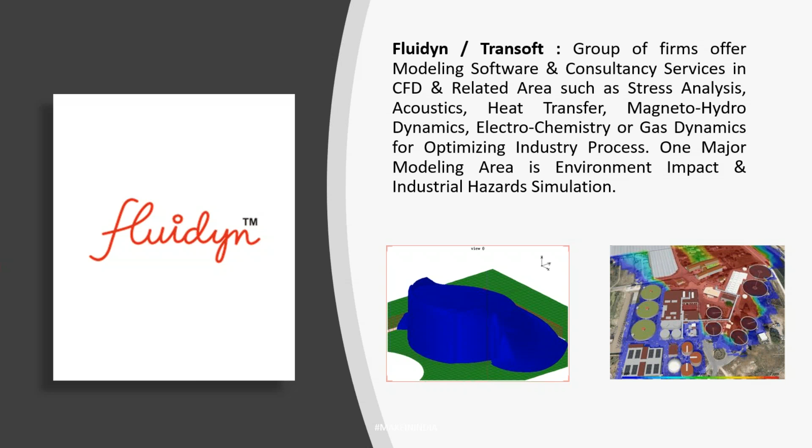Here we will cover some problems regarding what happened recently in Vizag with the styrene leakage. So this is our history. Since 1987, Transoft Fluidyn Group has had stable and consistent growth, and it is fully owned by employees for long-term stability and technical orientation.

We have scientific software development and solutions like optimization of industrial processes by multiphysics and general CFD simulation. Then industrial, urban, and traffic impact assessment and solutions. We have our Panacea product, and some risk analysis problems we are also solving. We have more than 100 PhDs and masters skilled personnel.

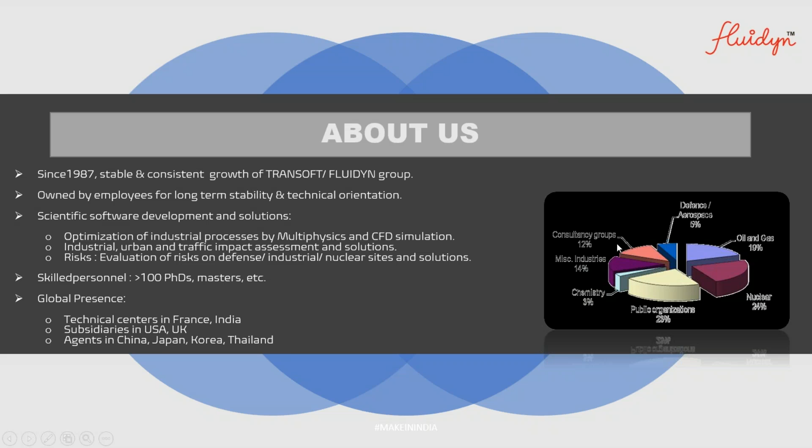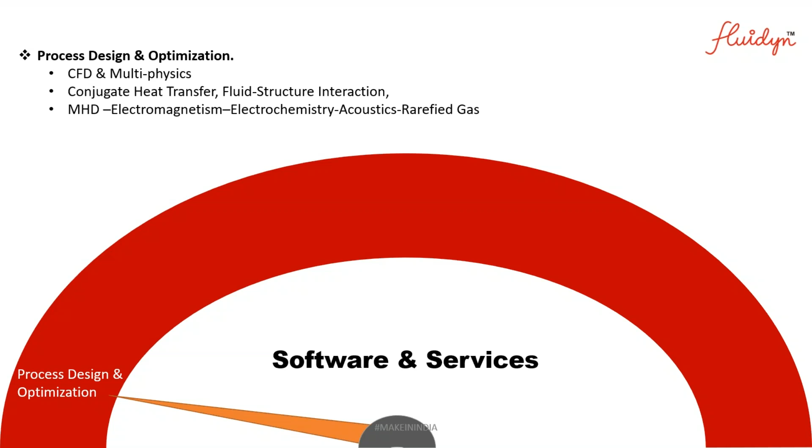So here I want to explain a little about our software and services. For process design and optimization, we have tools for CFD and multiphysics, conjugate heat transfer, FSI, fluid structure interaction, and MHD and electrochemistry. For environmental impact assessment, we have tools for urban air quality, health impact, industrial pollution, water, air, odor, noise; all kinds of pollution are covered. Source apportionment and leak detection in real time is also possible with our tool.

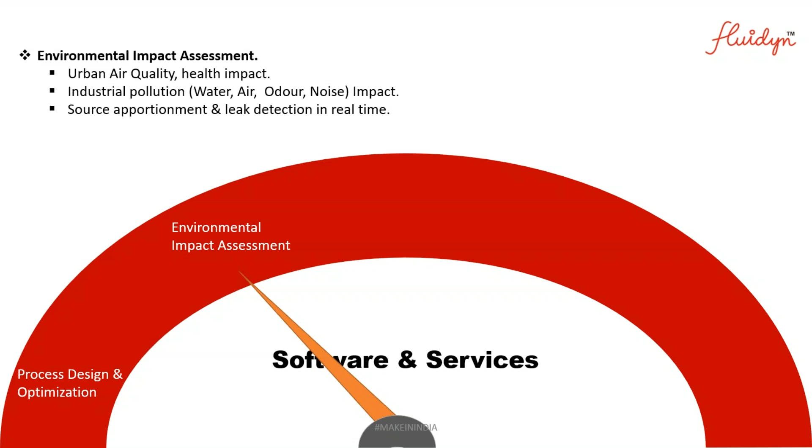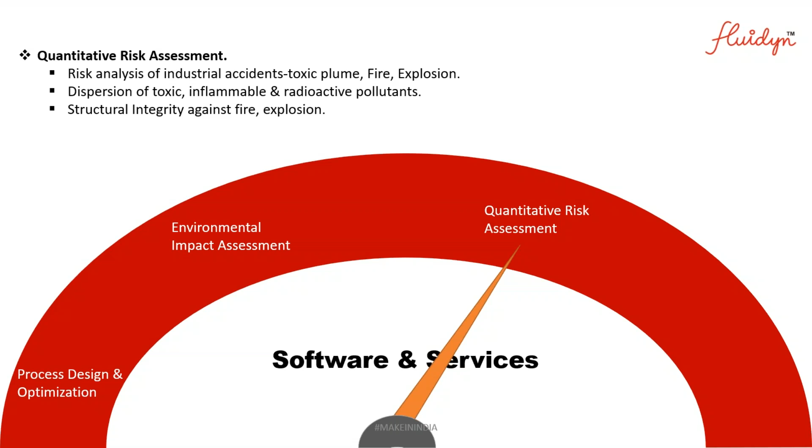Then quantitative risk assessment, risk analysis of industrial accidents and toxic plume, fire explosion, dispersion of toxins, radioactive pollutants, all kinds of solutions. And the last one is ventilation and HVAC, regarding energy efficiency, and some filtration applications. It is useful for hospitals, data centers, malls, parking, clean rooms, etc. Ventilation optimization is also useful for energy saving, airflow in roads, tunnels, mines, rail stations, etc.

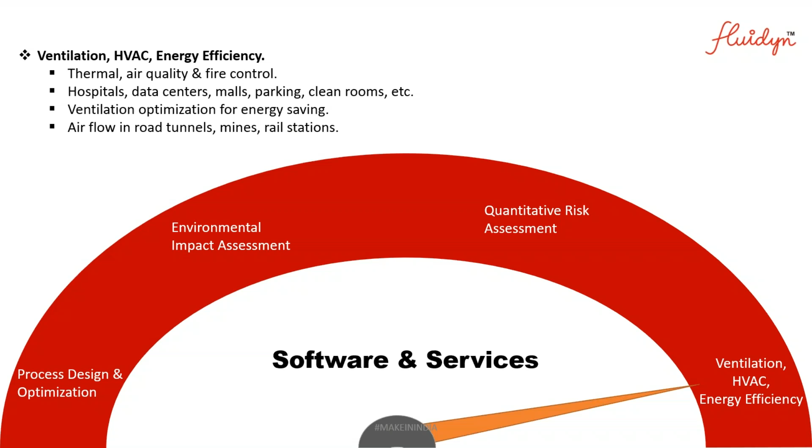I want to show you some key references we have in India. On the nuclear side, BARC, NPCIL, IGCAR, AERB; defense, DRDO. So many branches are there. Aerospace, ISRO, NAL, ADA. Then chemical, oil and gas industries, we have Reliance, EIL, ONGC, HPCL.

We are also in automotive and manufacturing. TVS, Gabriel, Renault are there, who are using our tool, or we have provided consultancy work to them. And many consultants are also there, like the French ministry and, from France, SIAAP.

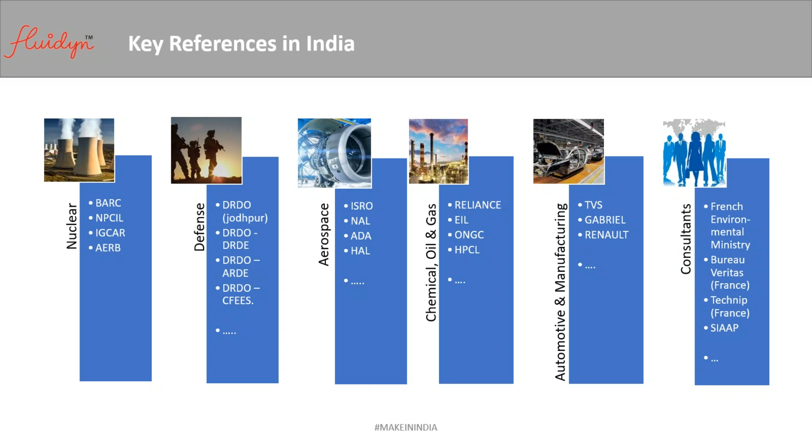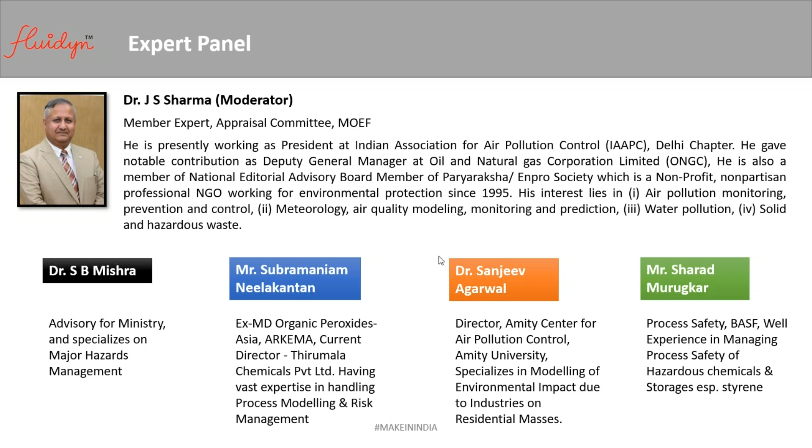Okay, thank you. Okay. So can you see my screen? It is not visible right now. Have you shared your screen? Yes, it is visible now. Yes. Okay.

So I'll just make a quick presentation to the colleagues who will follow up. This is just to show what simulation can do as far as the design and optimization of process is concerned, and specifically the case which we are focusing on today, which is the styrene storage process and how to store styrene. So thanks to the quick introduction done by Nirav, you know that we are dealing with optimization of industrial processes, which means a simulation of fluid dynamics, and by fluid, of course, liquid and gas behavior, but combined with the temperature.

So a combination of an interaction of the fluid with the thermal processes and the heat transfer, conduction, convection, and radiation, as well as the fluid structure interaction, which means deformation or displacement of the structure under the load, the pressure, or the temperature load carried by the fluid. So you have here a few examples, focused more on tanks: velocity vectors simulated into tanks, temperature loads onto structure carried by the tanks, and displacement and deformation of structure.

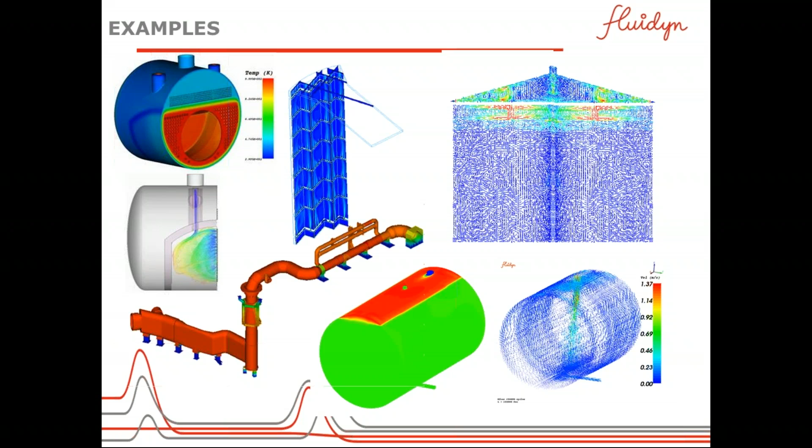So now, if we're going into the specifics of styrene, styrene is one of the components whose storage needs to be carefully designed, because it has to be maintained at a lower temperature, usually 15 to 20 degrees, because the flash point of styrene is at 31 degrees Celsius. I'm talking in Celsius here, sorry. So at that point it vaporizes and it polymerizes, and it can of course become gaseous. Below that point it's liquid. It can become gaseous, it's toxic, and it can also have a very exothermic reaction and lead to explosion. So every time there is storage of styrene, there needs to be a refrigeration of the tank.

And so the simulation can help investigate the process of refrigeration, when and how it should be refrigerated, or of course its failure, what happens in case of failure of refrigeration. Depending on the type of process on site, there could be several ways to refrigerate. The refrigeration can be shared between several tanks, depending on whether there is styrene in the tanks or not, and how many tanks of styrene are located on the site. Of course, it needs to be designed for various external conditions, including very hot weather, and it should be working whether the tank is empty, full, or being filled up.

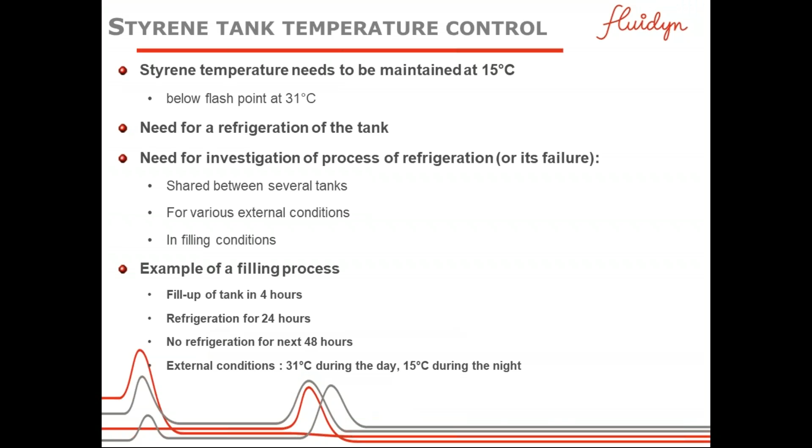So this is European condition, less extreme than the conditions in India. The external conditions we had to focus on were 31 degrees during the day and 15 degrees during night, which is summer condition in France. I realize this is a kind of low temperature for India, but this is just to show an example. I'm sorry, my screen goes blank from time to time, but I'm trying to get it back on very quickly.

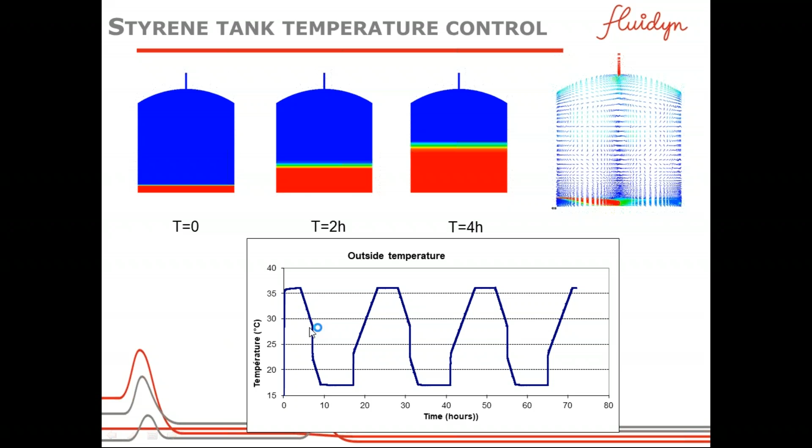You see here on the top view the simulation of the filling up of the tank. The red part is styrene, the blue part is air, and in 4 hours' time we are filling up the tank to about half. So this is the mass fraction, liquid fraction and gas fraction, and on the right side you can see the velocity vectors of the styrene coming into the tank right at the beginning. And you see also the cycle of the outside temperature, the tank surface temperature going from slightly above 35 degrees to slightly above 15 degrees during night and day.

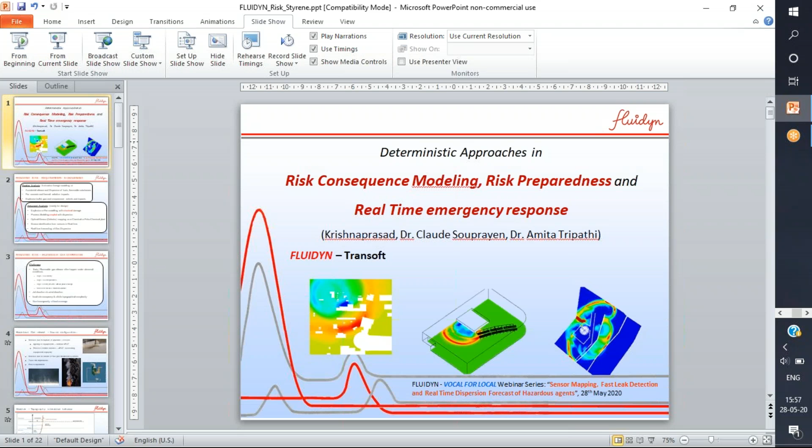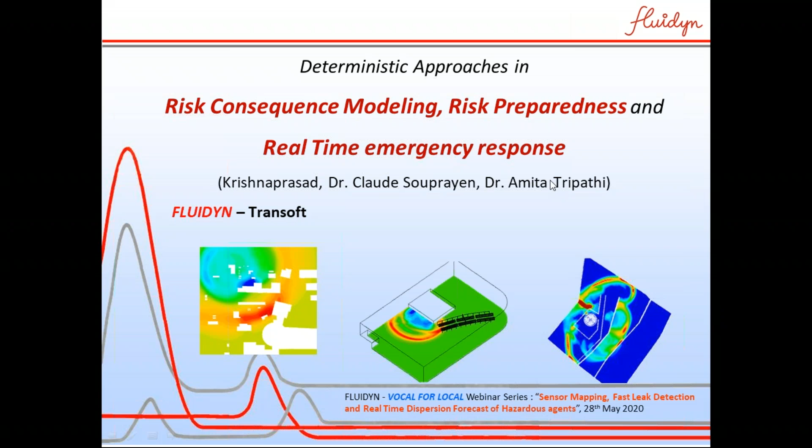Okay, so I'll be talking about what happens when some toxic material gets released as vapor or aerosol, without going much deep into the technical overall concepts of what will be the criteria for the modeling, etc. — the things we need to take care of while selecting any model.

So let me just give a brief introduction on risk, managing risk overall, not only with respect to dispersion. As a routine analysis, usually we do whenever we tackle risk, it will either be dispersion of accidental release and dispersion of hazardous materials, or it will be a fire, various types of fire, jet or pool fire etc., and their radiation impact, and explosion and their pressure wave effects. And most of the time, what is quite rarely done is the integrated approach to risk modeling, which is mainly required for design.

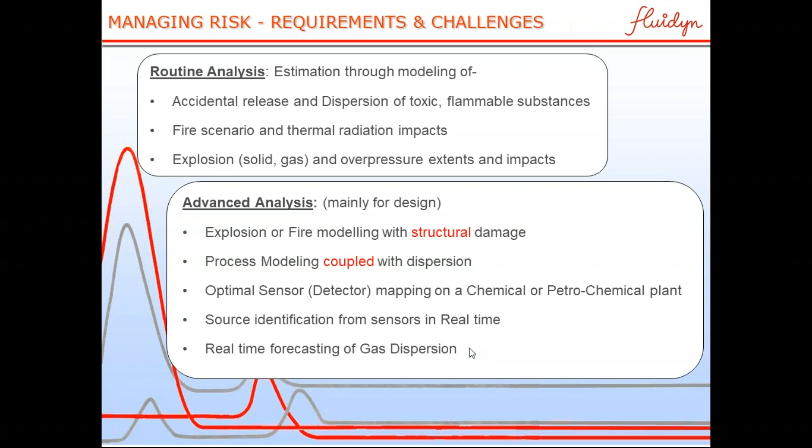How can we completely utilize the functionality of sensors, probably — and then real-time forecasting of gas dispersion. Whenever there is an accident and sensors pick it up, we'll identify the source. Usually in such instances, the place of leakage is not approachable, it's not accessible, so we'll have to do everything remotely. So some system should be in place which can give us an idea about where the leakage has happened, and how far the impact area is going to be, by sitting at one place, in fact.

Risk management when it comes to hazardous gas dispersion is not as simple as it appears to be. There are many minute things that may have to be taken care of during the modeling aspects. It begins from the release itself.

The toxic or flammable gas release happens under different conditions, mostly abnormal, due to failure of equipment or systems. It can be of high or low density, which has its own behavior during dispersion, and it can have high or low temperature. The local turbulence caused by the release itself will be prominent, and high velocity jets are also prominent. Often it is associated with or without phase change.

Initially it will come out as aerosols or droplets, then it may get evaporated, or it may condense in some other instances, for example the nuclear releases from a cooling tower. And often it is associated with transient phenomena, that is transient release also.

Whenever an accident release happens, it is not constant, it is not uniformly releasing whatever inventory is there. So there will be time varying releases, which need to be duly considered for the impact or risk assessment, combined with the transient nature of the weather. Over the period of release, the weather may not be constant.

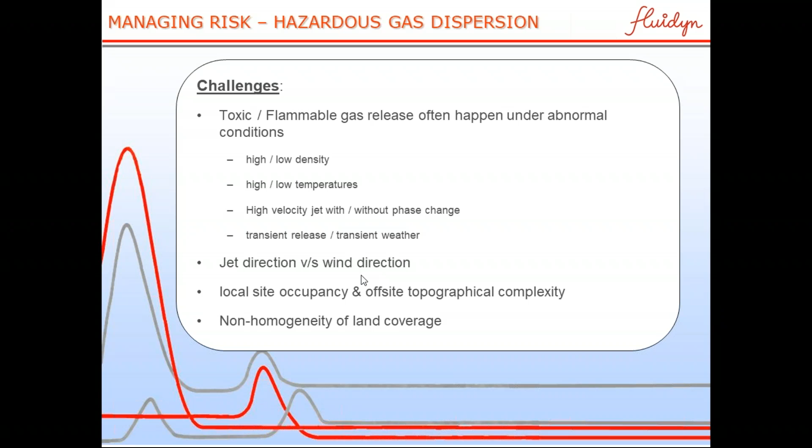Now, when I say the minute aspects that are to be considered during dispersion, it starts from the release itself, what type of release it is, how the release has initiated, and what is the configuration of the source. As we already know, these aspects are not being keenly considered in detail during modeling.

Release can occur due to rupture of pipeline or vessels, aging of equipment under normal operating conditions, process control failures, or even, as happened in Vizag, failure of safety equipment. So the normal operating conditions will not be there, it will be abnormal. In both conditions the release could be different. Under normal operating conditions, the material may get released as gas alone or liquid alone, while under abnormal conditions it may come out as some other phase or with some other force.

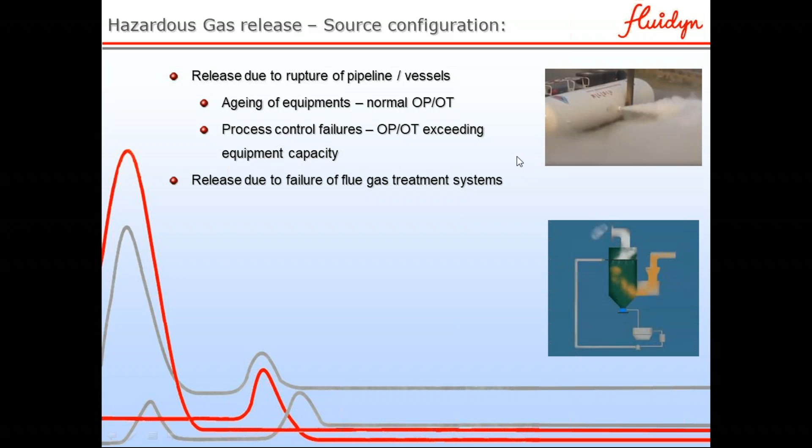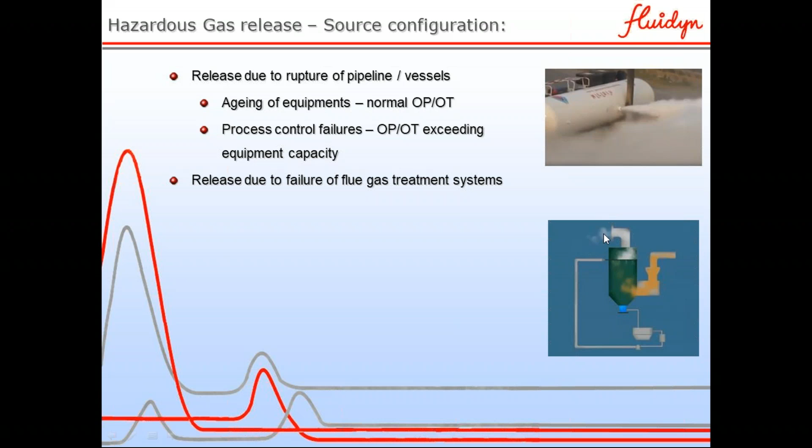Secondly, release due to failure of flue gas treatment systems. Whenever a release happens, there will be a vacuum system which collects such toxic gases, and a system which treats it. But if that system itself fails, what is going to be the release? This release is completely different from a pressurized release. Here the concentration as well as the behavior of the gas coming out will be completely different, which is to be taken care of while modeling.

The third instance is toxic byproducts from fire accidents. A material that isn't very harmful when evaporated or released normally can become highly toxic when burnt. The smoke and fire byproducts that come out have high energy and high temperature, so they get lofted into the atmosphere and settle somewhere else. This fire also happens over a larger region, so you cannot treat it as a source coming from a point or a small area.

Then there's evaporation from the pool, which is quite different from what we've seen previously. This is highly transient - as the heat energy available changes, the evaporation rate also changes, and it just enters without much force.

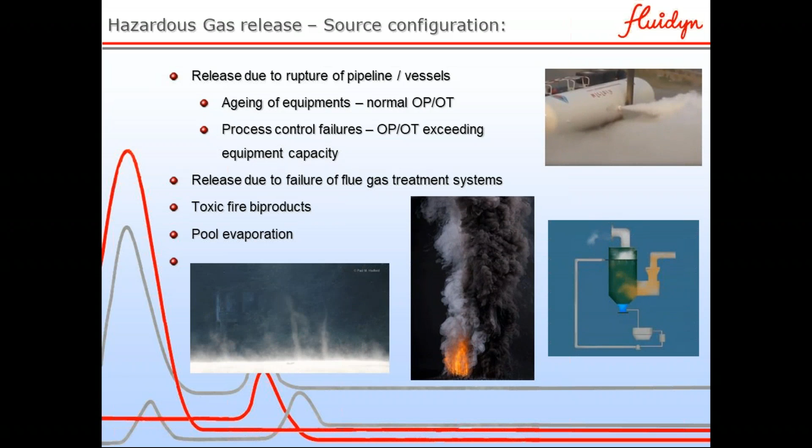All these release types are essential to capture when we do dispersion modeling. The second and third major aspects of dispersion modeling are weather and topography. We can consider them separately, but mostly they behave together. I'll present one scenario with a highly non-homogeneous path for the plume, where it has to encounter a township, or pass through a forest region, hilly region, or water bodies.

Whenever wind enters a region, it enters in different layers - there will be some profiling and stratification of wind in the vertical direction, not uniform throughout. In the bottom layer, where human activities are prevalent, based on our activities and the land coverage the plume has to travel through, this will have its own influence on plume dispersion and plume propagation.

Once we consider this on a larger scale, for example over a region of 5 to 10 kilometers, we'll encounter such phenomena. Coming to a more local environment, we see buildings with circulation patterns between them, and vegetation over which the wind passes, creating high turbulence or variations in wind direction and velocity. Especially in this layer, the mixing layer completely changes from meter to meter, or even over 10 meters, for local scale or micro scale modeling.

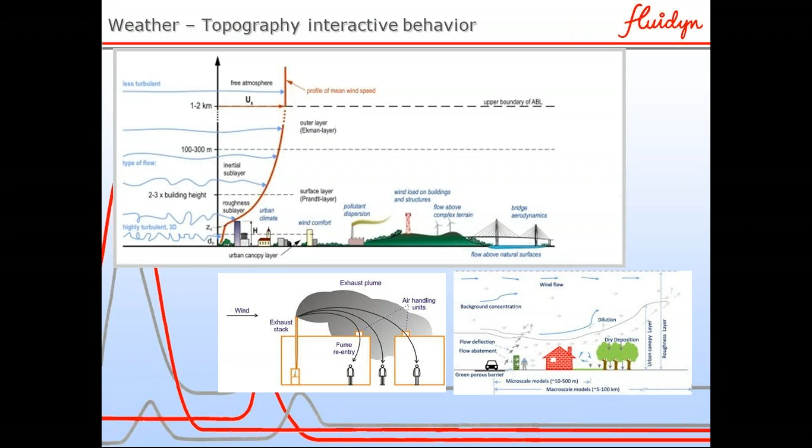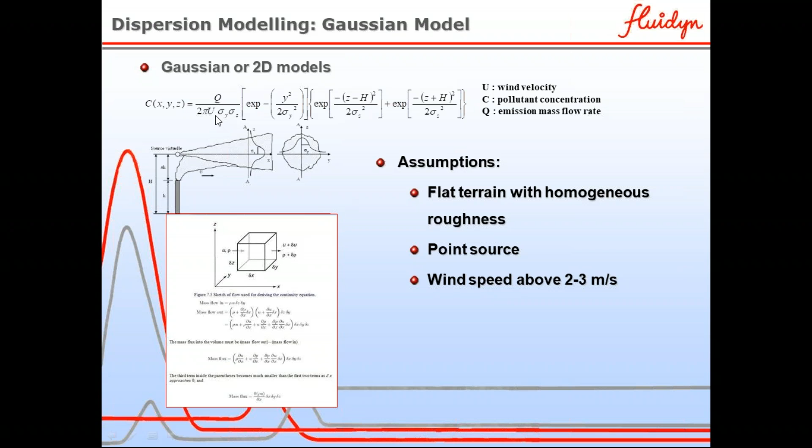This has been derived by assuming a point source, and by the nature of this equation, it is only applicable for wind speeds above 2-3 meters per second. We see that velocity comes in the denominator, so if velocity approaches zero, the equation fails. This model is also reliable only for regions beyond 200-300 meters from the source.

So any model which makes use of this particular equation, or any other form of this equation, may not be very much useful in estimating, especially the risk, because when we talk about risk, we don't talk about kilometers of distance. It will be mostly near the site or near the release point, at the most. That's it.

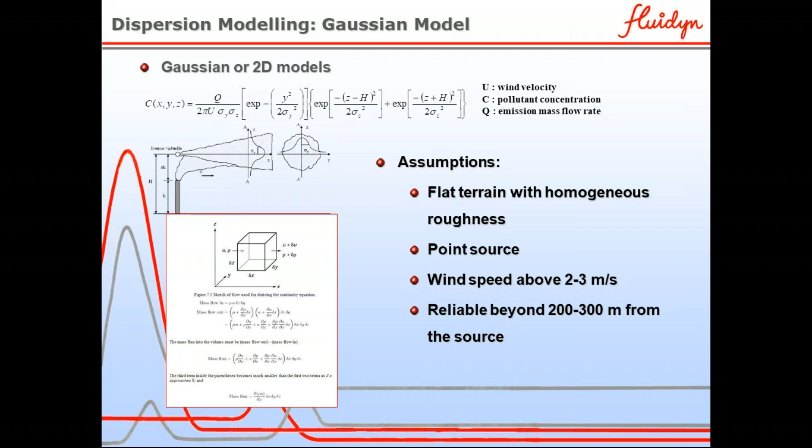So then, what is the alternative? There are some, of course, deterministic models which can take care of this by duly taking into account the aspects that are supposed to be considered in the dispersion modeling. In fact, the first is the topography, as we have seen, site data. Usually, as a step in deterministic modeling, the complete physical description of the site that we need to model has to be taken into account.

When I say physical description, it means altitude, terrain undulations, or within the site there may be a lot of buildings, etc. There may be several facilities around the site in terms of urban region, or there may be vegetation area, etc. Then once we capture all the details of the site, meshing is done. That means we completely discretize the domain of our site into small control volumes, small boxes. It is not a single box; millions of boxes will be created.

Then we study the wind flow, how the wind gets modified when it flows over the region of interest, duly taking into account the features. For example, if I take the example of Vizag, it's quite on the outskirts of the city, so there are city buildings adjacent to the plant and buildings within the plant also. So how it gets modulated, we have to note, because this is the wind which carries the toxic material downwind. Once we establish the flow field in the region, we subsequently proceed towards dispersing the plume under such wind conditions.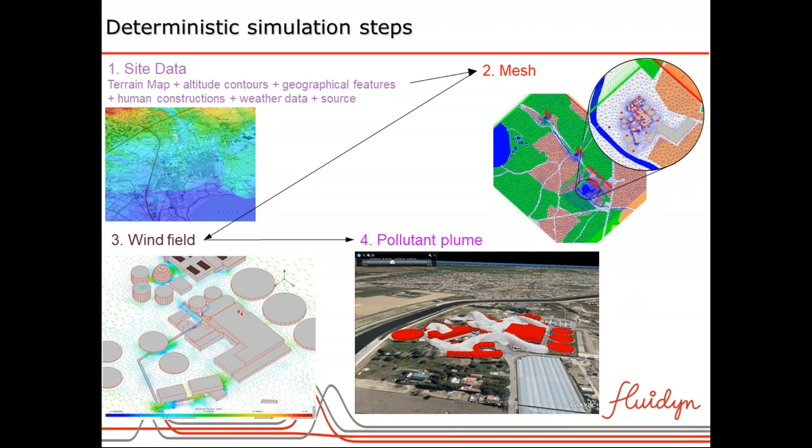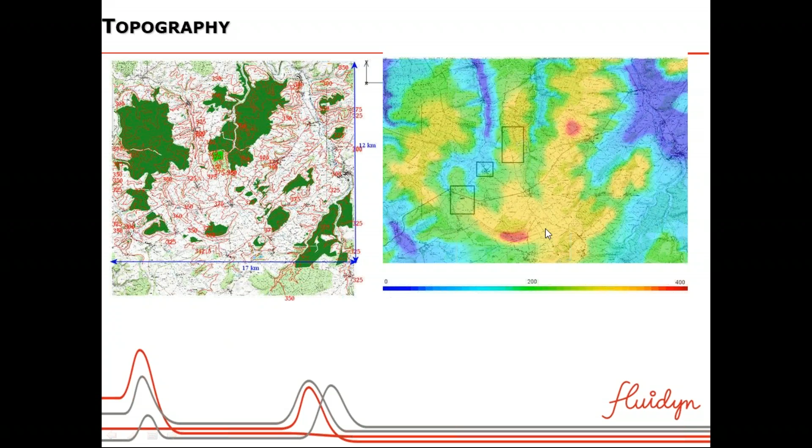Now, broadly, it's the overall topography. When we talk about dispersion over a large region, for example over 2-3 kilometers, then the complete topographical nature of the region can be considered. Whether it is a highly mountainous region, a forest region, plain land, or an urban region, etc., can be captured in the model. So in what we call the CAD model, the model shall have the capability to consider all these features as CAD objects, the representative objects.

Similarly, close to the site, as I said, whatever happens close to the release point should not be neglected. That is also very important in estimating the initial cloud. So initial dilution or initial accumulation of toxic material is also very important. That can be done by properly considering the site features, the facilities within the site, what we call obstacles to the flow or obstacles to the dispersion.

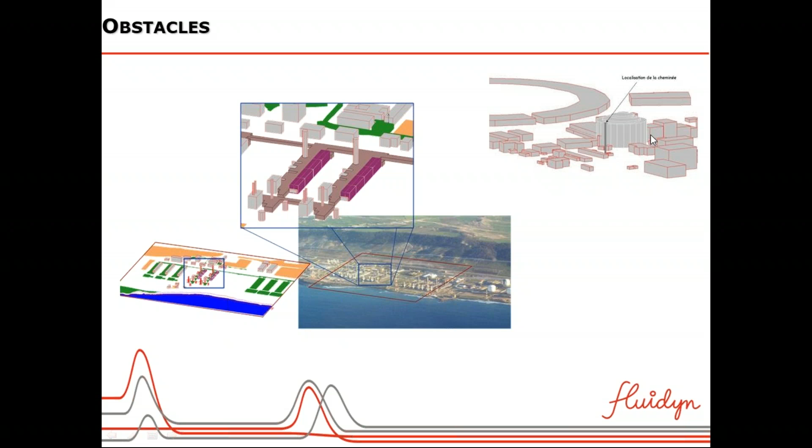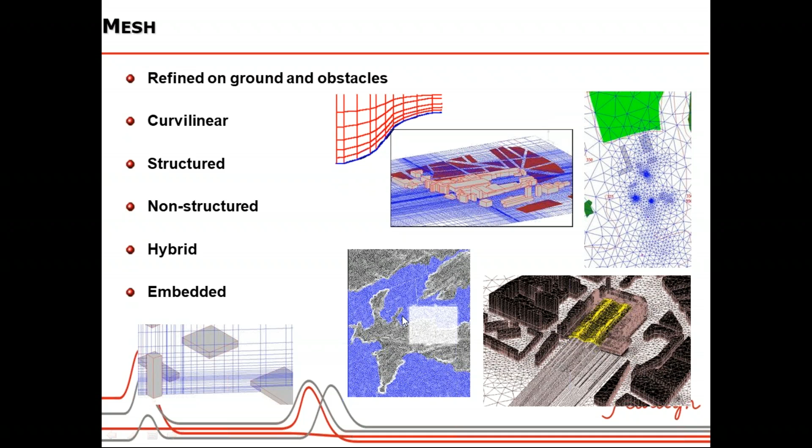Then it is aptly meshed. The model should have the capability to consider them properly, and the proper mesh has to be created. We can see that based on the different site configurations, different types of mesh are being generated here. The model will usually have its own built-in capability to do that.

Yes, sir. Please, we have some time limitation, so if possible, finish as soon as possible. Yes, I'm closing it, another 2-3 slides. Okay, it's okay.

So once we have captured all the 3D features of the site, its physical topography and all the 3D physical features, we carry out the flow field analysis, that is wind flow, using CFD. We can see, in the close site area, the influence of the features on the wind, for example how the wind flows around the buildings. And on a larger scale, we can see how the wind gets modified in the presence of undulations. In a vertical section, we can see how the flow layers change from point to point.

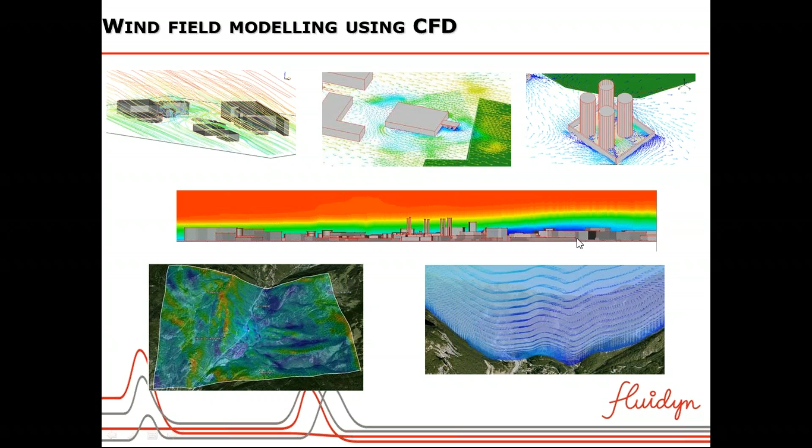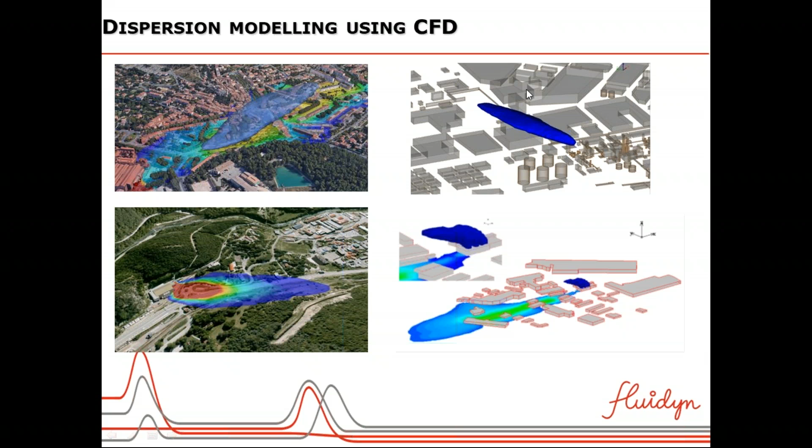Then finally we'll carry out the dispersion over the wind field established. This is how it looks in different instances. Whatever you see here is dispersion over a highly undulated region. Here we can see the dispersion over a highly congested area, which has a lot of buildings around, etc., within the plant. So here there are a couple of animations which are self-explanatory when it comes to

dispersion of cloud. So we can see that this cloud doesn't have any fixed shape as we assume in some other 2D models or contemporary, simpler models. It will gain its own shape whenever it encounters some disturbance in its downwind direction. We can see that after some time, in this case especially, the concentration gets built up because the plume that gets lofted in the beginning will come down and get recirculated inside here.

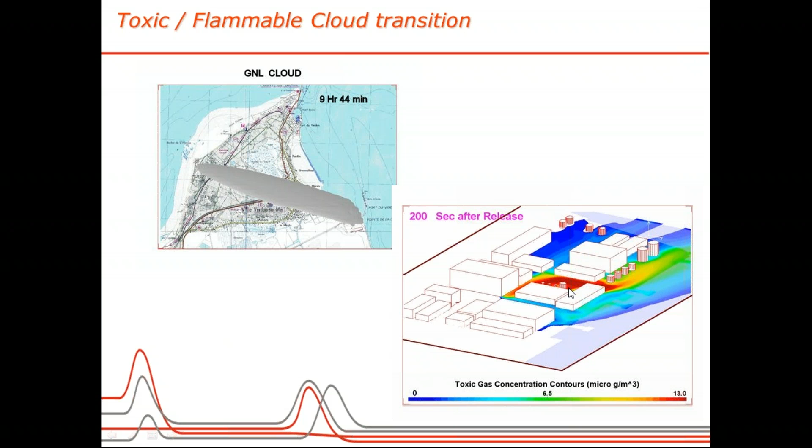A couple of other cases here with the cloud movement as well as transport in the downwind direction. This is a heavy cloud of some toxic chemicals. Now, of course, this sensor mapping, mostly my colleague Dr. Claude will be presenting it. Anyway, let me give some brief introduction.

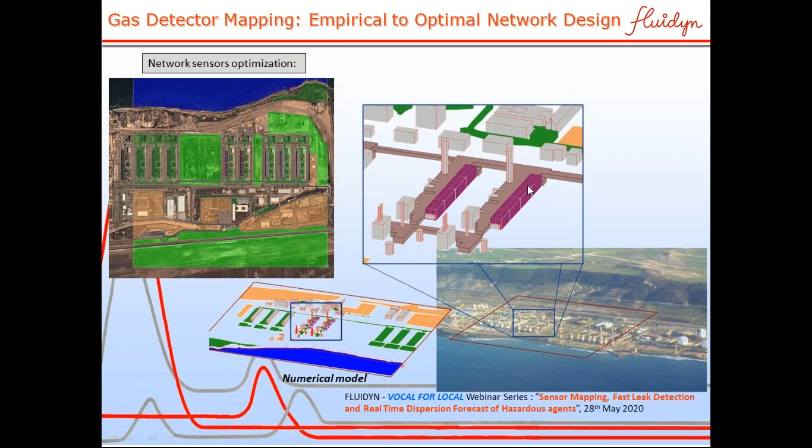Whenever we do sensor mapping, the same aspects we have considered in dispersion have to be taken into account, because the sensors are placed to capture the dispersed gas. So how the gas disperses is very important to model in the beginning. So we first develop the CAD model, then we identify all the probable sources, and establish the flow field. You can see in the vertical direction how the wind flow gets modulated over this region, and how the dispersion also gets modified.

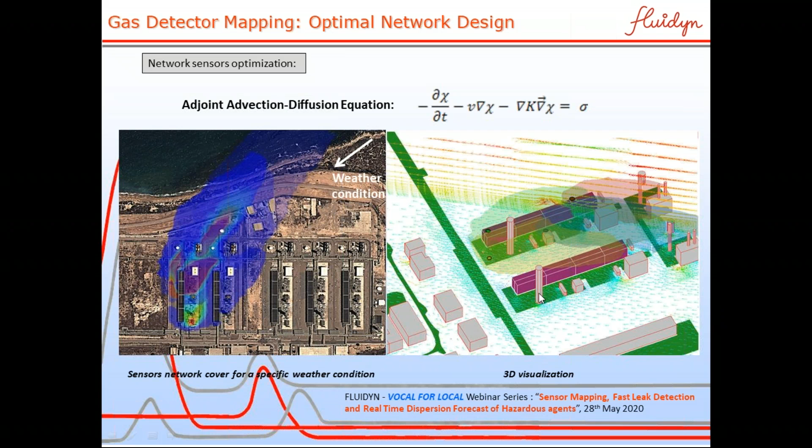So we formulate clouds from all the possible sources and superimpose them in realistic conditions, duly taking into account all the obstacles and the wind modulations. The cloud formed due to any eventual leakage will be identified and mapped, and the overall map of all the leakages will be used for the sensor mapping to identify the locations of non-coverage. For example, if some region or some source is not covered, how to change the position of the detectors so that a single detector can serve multiple leakages.

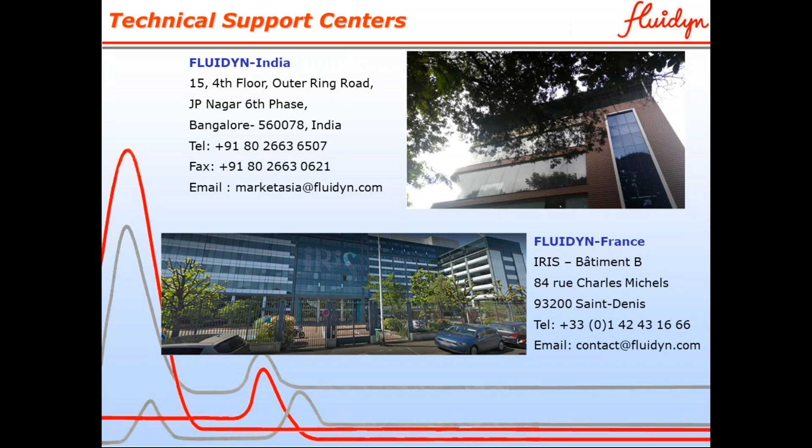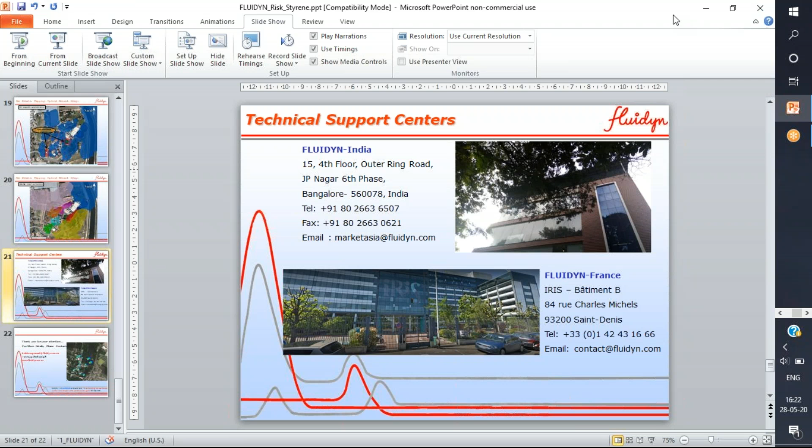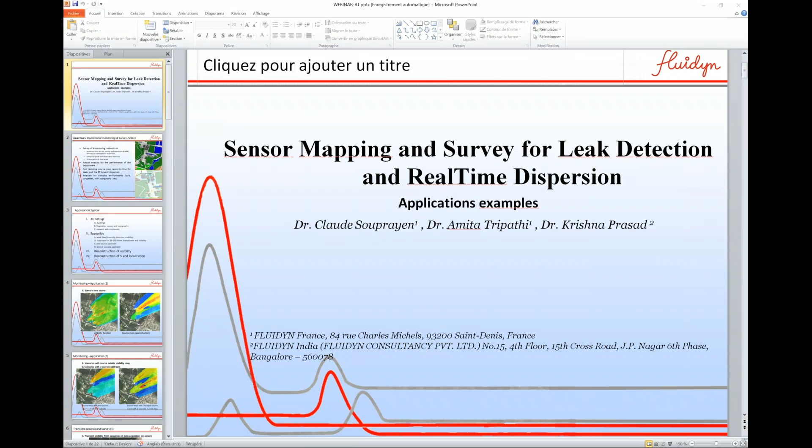Yeah, can you hear me? Yes. Okay, good. So I'll share this screen. So I have 70 slides. It should be okay for the presentation. I will focus, as explained... Okay, Dr. Claude, you can proceed. Claude, sir, your voice is not audible, I think. Mr. Claude, are you there? Maybe I'll take over until the sound problem from Claude is fixed. We have had problems with sound from the French side since this morning. I'm sorry about that. Claude, if you can hear me, maybe put your presentation on, and I will start. Only Claude is not audible. Maybe I can share my screen, and Claude can pick up when he can. Okay. Claude, can you change a slide?

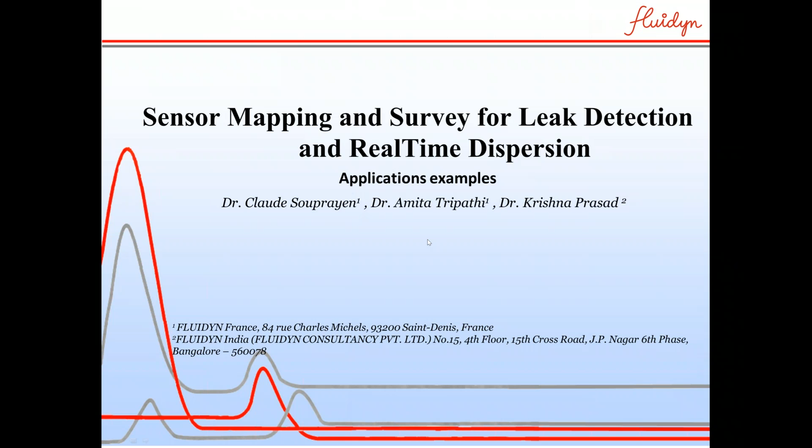Thanks. So just to explain what we'll present here: we will present the real time. In case of the unfolding of an accidental event, how we can take measures to know when and where the leak is happening and how it will unfold. I know there were questions about this. We will also show a quick simulation that Claude did regarding the Vizag accident, what we could make of the information we could get and how we could model the unfolding of the accident. This will come up during this presentation. Claude actually did the work, so I'll supplement for him until he gets the audio back.

So just to explain what we did, this was something that we had done initially for the Army, but has now been deployed for all industrial cases, where we have a monitoring system. Can you share my screen, please?

Yes. Thank you. Thanks.

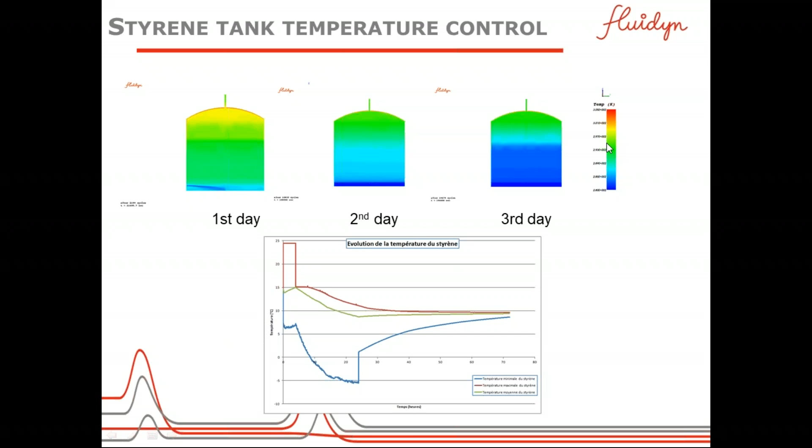This is a monitoring system to monitor in real time accidents that may happen on site. To do that, you have seen how Krishna Prasad explained how we needed to take into account the 3D setup, so buildings, topography, and also the network with sensors. And to go to a reconstruction of the unfolding accident, we need first to know where the source happens.

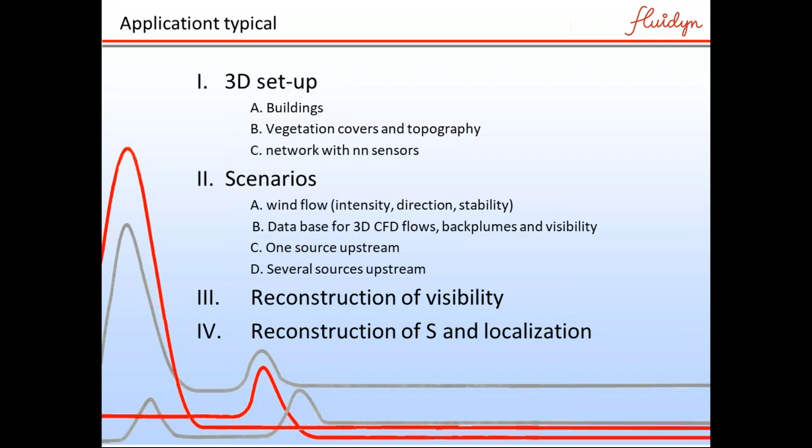Maybe I'll go back. Depending on the measurements and the information that is being given by the network of sensors, from that information, go back in inverse modeling, in inverse time. So go back in time to see where the source is coming from and how much of the material is being released, and then do a fast forward simulation to see what would happen in the next 15, 30, 45 minutes to know what to protect and where to protect people, where the cloud will go. So not divide your efforts and really go to where it is needed.

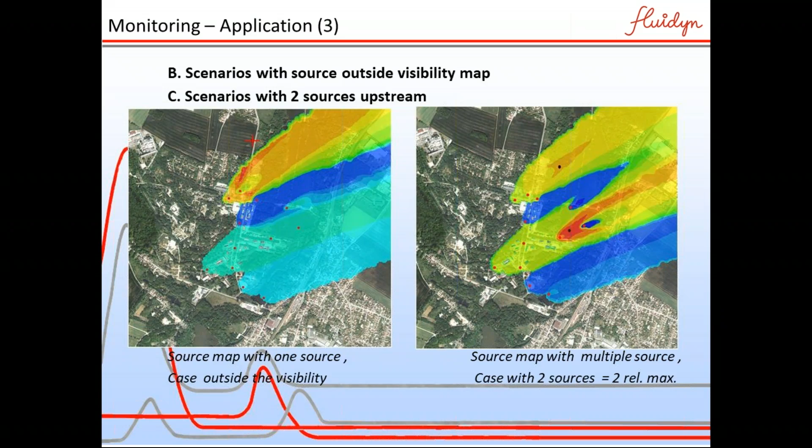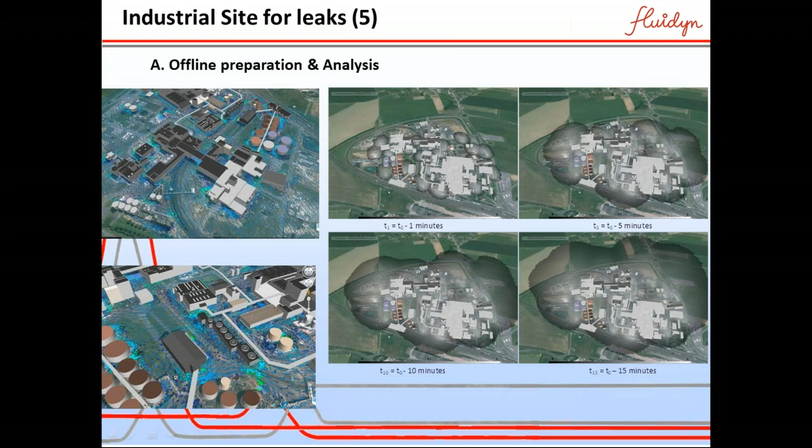So you see here doing it in real time, integrating the actual measurements, the real data, in real time into the software, and you can see the visibility function changing. So due to time constraints, I'll just jump to this simulation where you can see in real time the emission source is located here, and with the measurements arriving at the sensor network, the system goes backwards and gives, in a few seconds, where the source is expected to be. That's where the red patch occurs here.

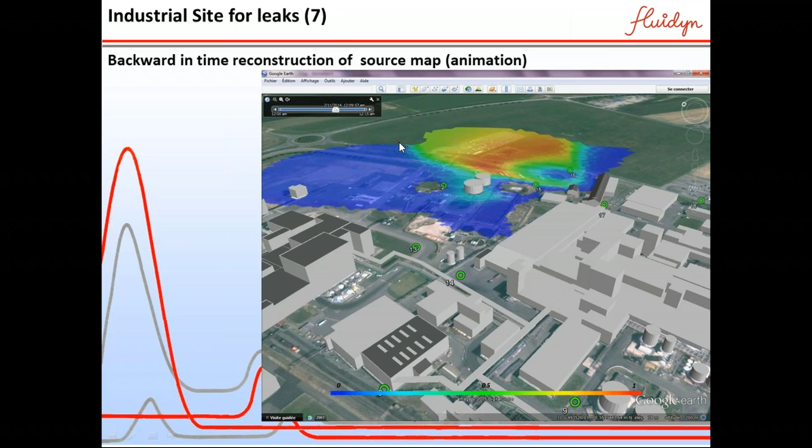Amita, Dr. Claude's voice is now okay. It is audible. Oh, okay, good. So we can hand over to him. Okay. Yes, sorry for this trouble with connection. Thanks, Amita, for catching up.

Just a few words about the conclusions. The real-time system we deploy is made of several bits. The first one is the optimal sensors; we use this visibility function. The second one is to localize instantaneously the sources and intensity as soon as a set of measurements is coming from the sensor network. So if a sensor has a sensitivity which is good enough and fast enough, we can have a few seconds to locate the sources. So in the control room, when the system is deployed, the operator can see immediately a source map and can identify the location and operate mitigations.

The last thing is that the system is compliant with background sources. And in case, for example, a unique sensor is failing and producing wrong values, since the data collected by the other sensors is interpreted simultaneously, you can identify which sensor is failing and giving false alarms. And multiple sources can also be identified.

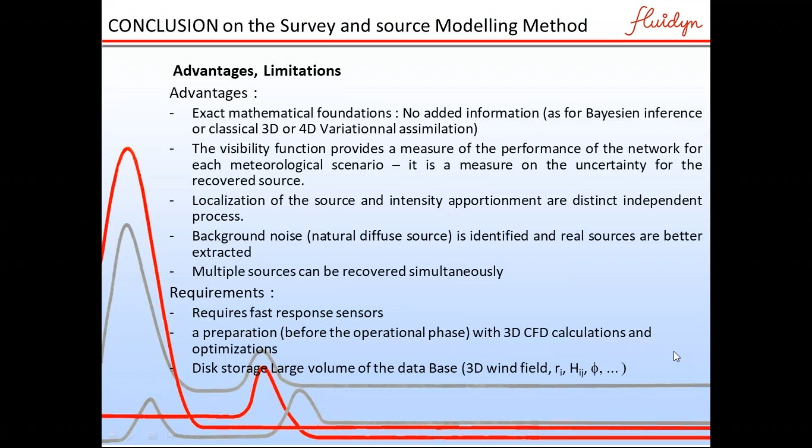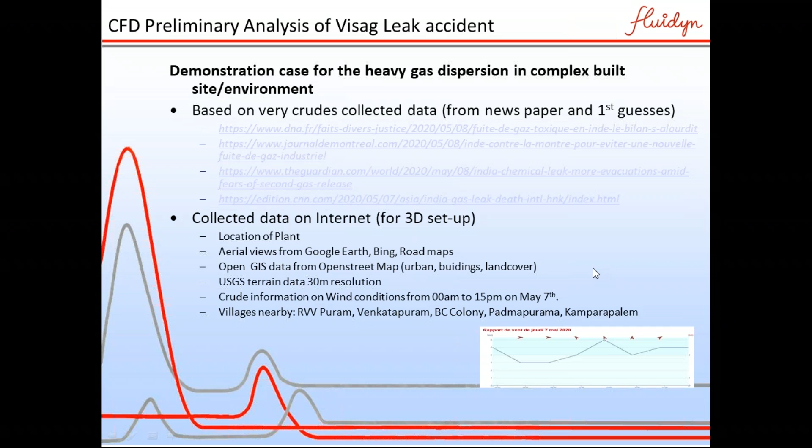So can I share my screen, or Amita, can you just keep the slide for me? Okay, thanks very much. The second part of this talk is... okay. So I'm going back on mine. Yeah. So I'm going back on mine just to explain what we did on Vizag cases. Can you see my screen now? Yes, yes, it is visible. Can you change it to presentation mode, please?

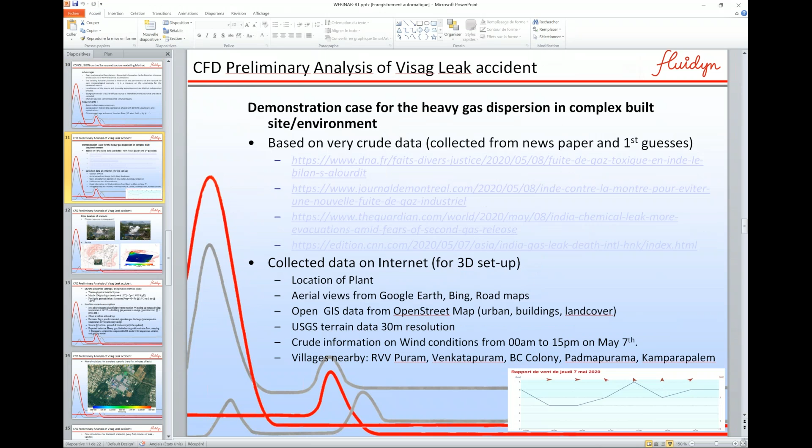Okay. So it's a few slides explaining the very first demo cases of the technology that can be deployed for real accidents. So take it as demonstration cases, because in this case we used very crude data collected mainly from newspapers and first guesses. So you have the list of newspapers that we've been using.

And we also collected on the internet, specifically to build up the 3D models, information like the location of the plant, the aerial views from Google Earth and from road maps. We also collected GIS data. GIS data is quite useful because it provides the land cover and some of the buildings. You'll see later that for this plant in Vizag, we had to use the aerial view to build the buildings.

And we also have direct, free access to USGS terrain information with quite a good horizontal resolution. We also used crude information on the wind conditions occurring from midnight to 3 p.m. on May 7th. And we also noticed from the newspapers that some of the villages nearby the place had been impacted.

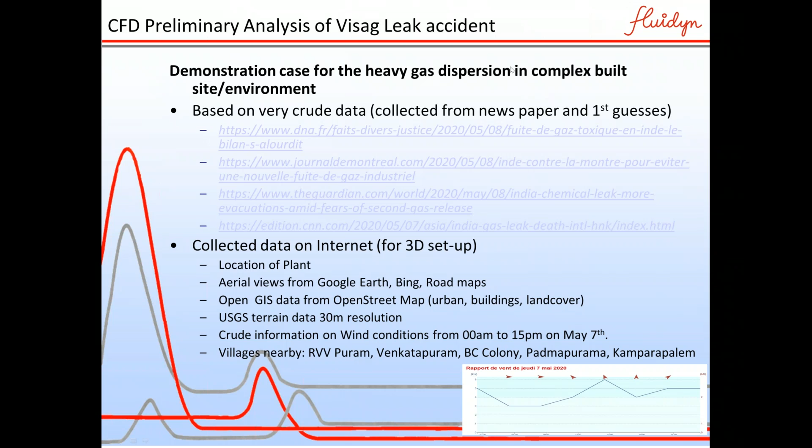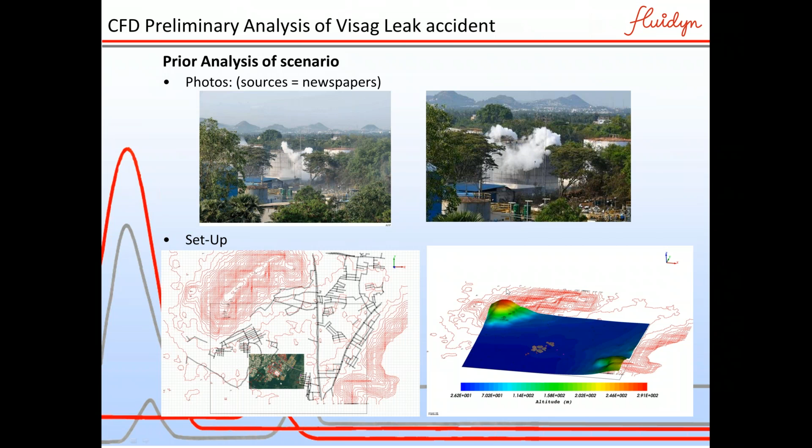So we also had to guess possible scenarios. We've been using thermophysical data for the terrain. For the dispersion, of course, we need the gas density and molar mass, because it's a heavy gas at normal temperature. And we also used the fact that when reaching 145 degrees, which has been reported in the newspapers as the maximum temperature in the reservoir, the overpressure can build up to 1 bar. So it means that within the tank there could have been a partial pressure of styrene, and the total pressure could be 2 bars.

So we used this estimate and very rough, arbitrary sizing of the valves to estimate a flow rate in kg per second and the properties of the gas at 30 degrees. The source is located somewhat arbitrarily near one tank at ground level, even if afterward this may need to be updated in a post-accident analysis.

Because we expect heavy gas behavior with limited mixing with weak winds, and nighttime and early morning winds were quite weak, we expect a creeping behavior for the cloud. And for the solution we also need to solve the Navier-Stokes equations with temperature and a gravity model. I'm not getting into too much detail on the model itself because Krishna Prasad already explained it.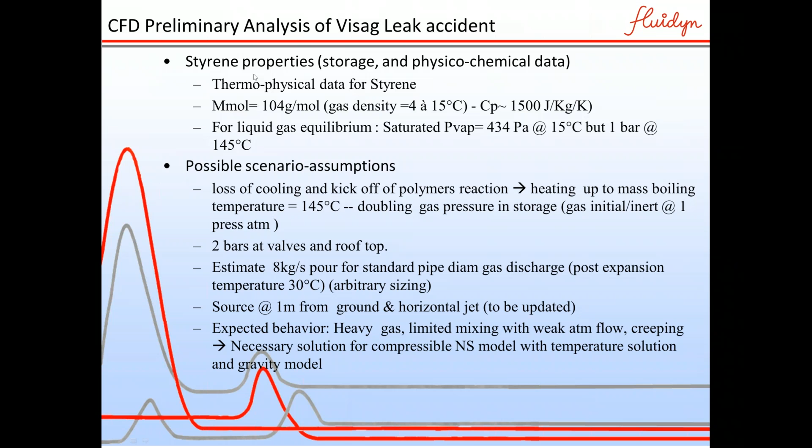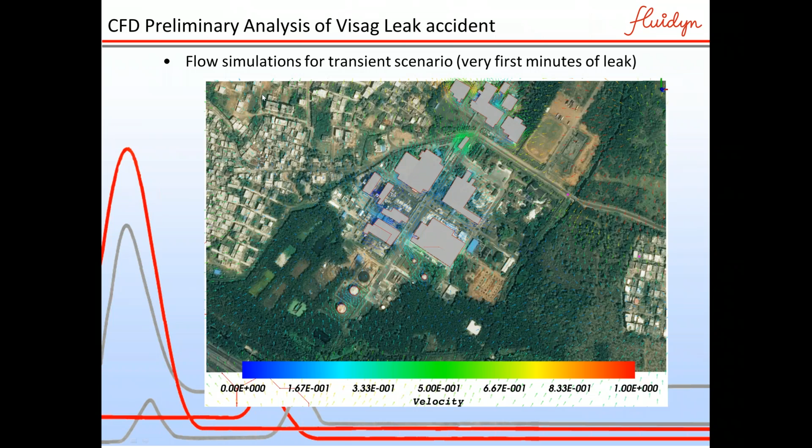So the very first output of this case is what you can see here, the top view of the plant with the two reservoirs and the flow which is developing. It's weak winds, so you see the scale. It's only 1 meter per second maximum at ground level. And in this wind, you can see how it's evolving.

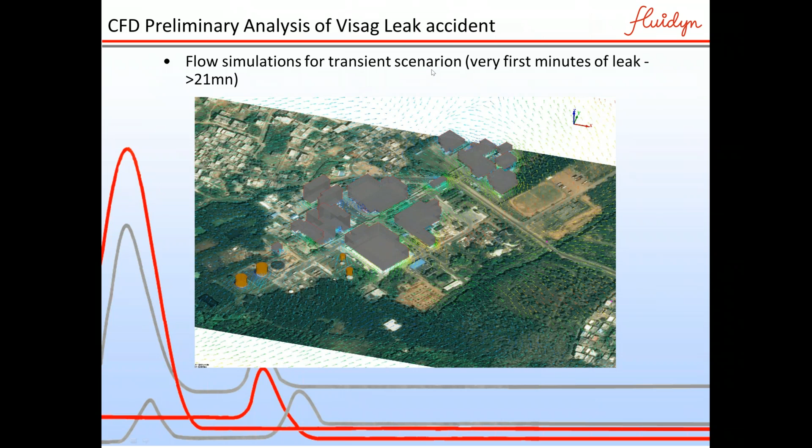I don't know if it's animated, this kind of plot sideways with the buildings, and in between the buildings, you see how the flow is evolving in time, changing in the lee of the plant. So based on these calculations performed for the very first transient scenario, 21 minutes, we dispersed the cloud from the possible initial origin of the gas with the first estimate of release rates.

So you see the cloud evolving for the first 21 minutes, and the threshold color shading is basically taken as 1×10⁻⁴ as a mass fraction of the gas, which means slightly less, one order of magnitude, 10 times less than the expected IDLH effects on people. Of course, those data need to be refined with a real estimate of the release rates, but it gives you the paths of the cloud evolving in time for the very first minutes.

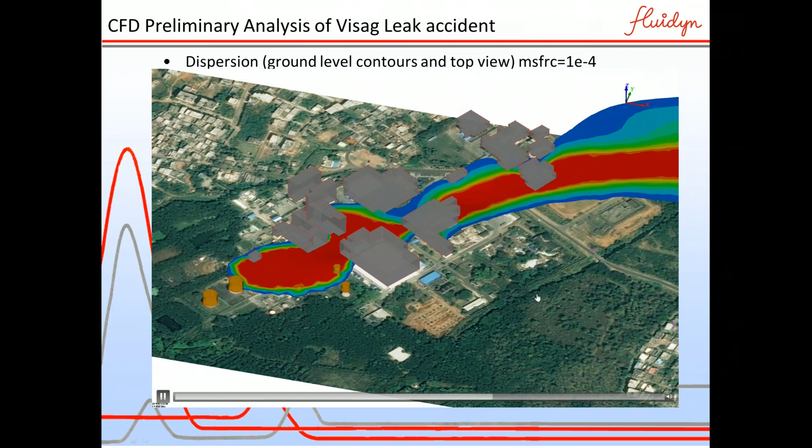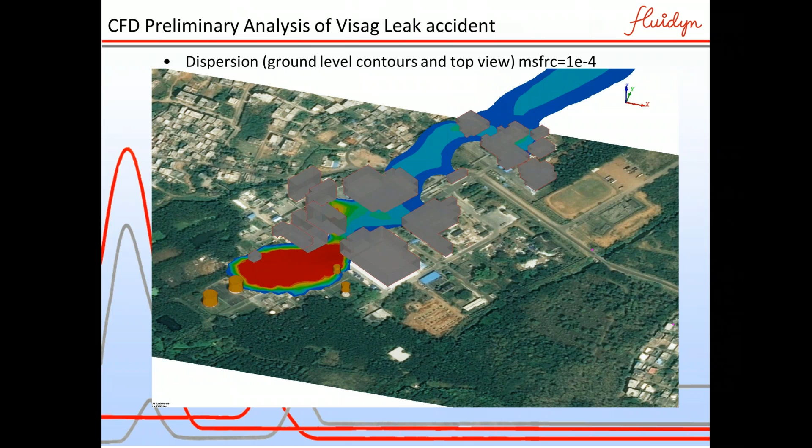So these are the very first illustrations and demo cases of the Visag accident, where based on very simple information, GIS data, aerial views, and basic information on the very first analysis of the scenarios, we can produce 3D models and analysis. Of course, for the LG plant, we have no access to the sensor data if there were any, and thereby we cannot use the data collected before the kickoff of the leak to see whether we would have been able to relocate the sources and produce an early warning alarm based on inverse modeling and sensor data analysis.